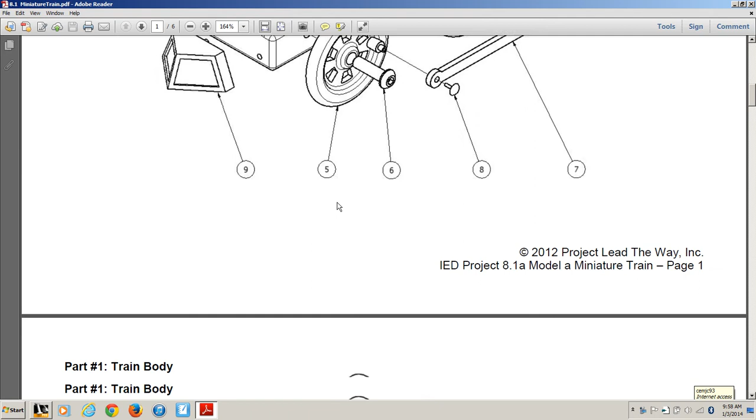As we go through those videos, it's very important that you not just watch the video, but that you also have the train body and dimensions in front of you. Some of the dimensions will be harder to see on the screen, and you'll need to pull them off of your document.

That's one thing that's very important. And the other thing is, some of these steps you probably could build most of the train body on your own, although you're having to pull together all these different skills we've learned into building the part. The only more challenging thing, that we haven't done much yet, is working with work planes to drill the hole in the top.

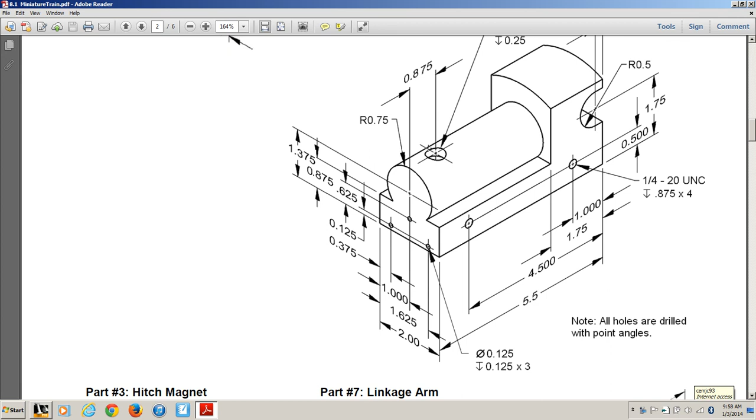So let's go back. The other thing to realize is, how are you going to build the train? What orientation are you going to build the different parts in? When we start a sketch, you want to always think about that.

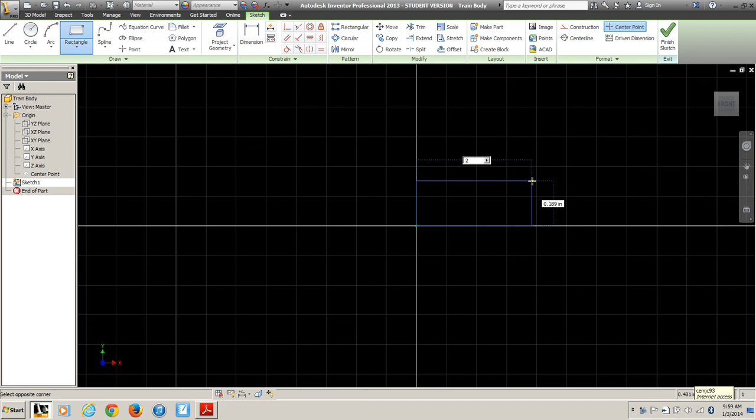So for the train body, we'll start out with a rectangle that's 2 inches wide by 0.875 inches tall.

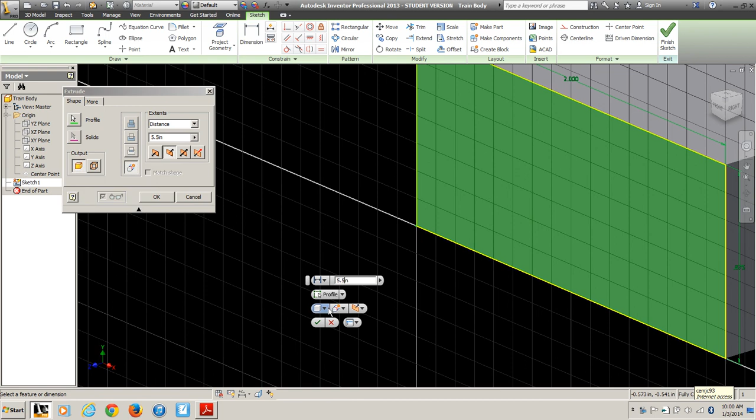Okay, and then finish sketch to extrude, and I want to make sure I go back, and I'll go ahead and go the full length of the train. Okay, so that gives me basically the full length of the train.

Next, I'm going to start with a sketch on the front. Let's go ahead and put a center point on there. Make sure it's in the center, make sure that's exactly 1 inch.

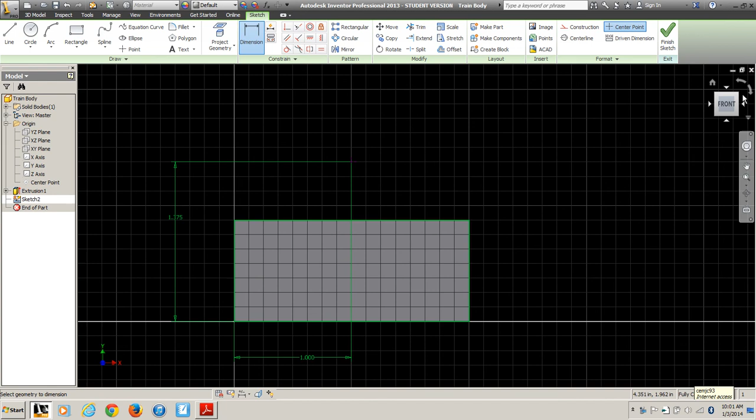And then that also needs to be 1.375 above the bottom of the train. And then we could just do a circle, and the radius of that circle is 0.75, so the diameter will be 1.5.

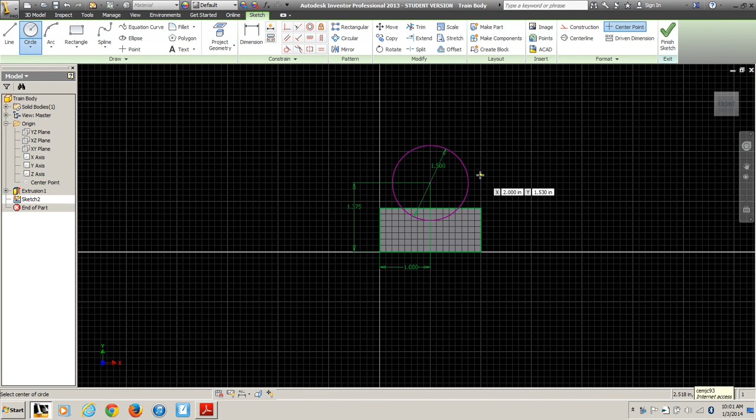And I want to just go ahead and extrude that, joining, and go ahead and go the full distance. Okay, and that's okay that we have that barrel on the front where the locomotive is.

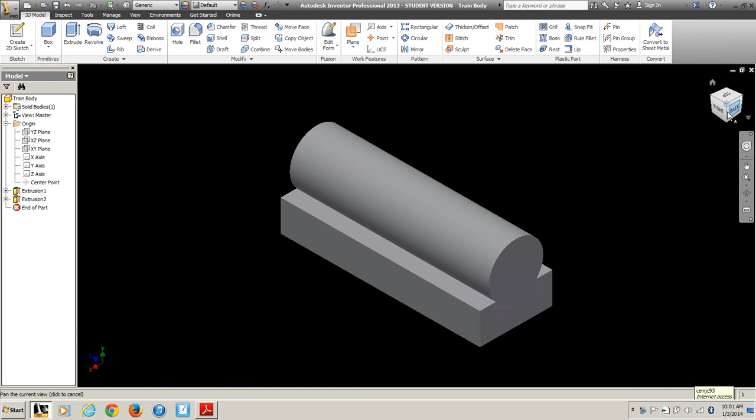Let's go ahead and flip around to the back side of the train. Although it's the front and back, I want to continue to build it in the orientation that I'm going to do. And then you'll notice that on the back of the train there's an arch there, and it's centered off of a hole.

So what I might want to do is go ahead and drill that hole for the hitch peg first. So then I can use that geometry, make sure that's an inch from the side and 0.375 from the bottom.

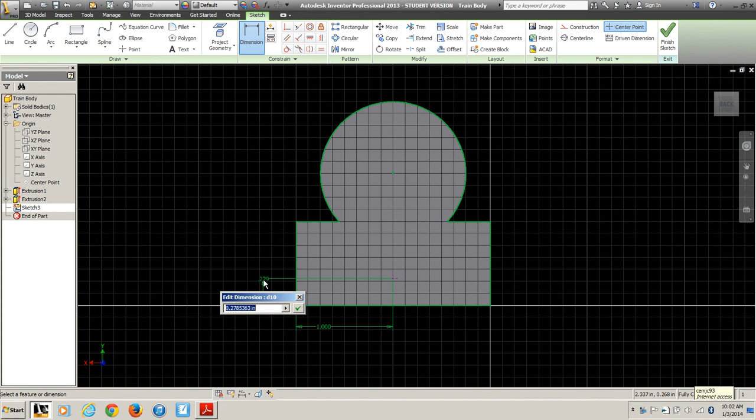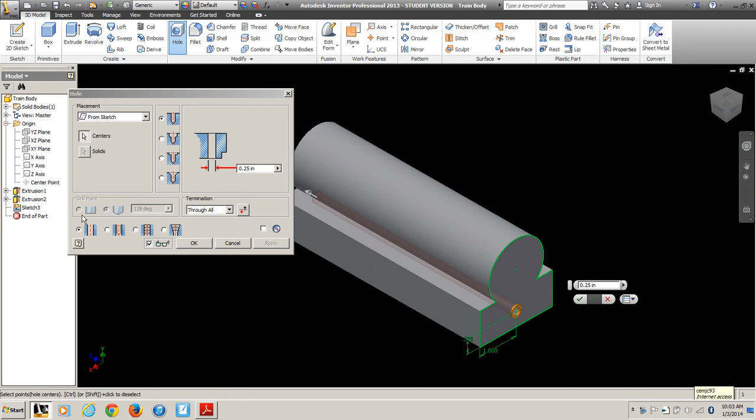Okay, so once I have the hole, then I'll go ahead and throw another sketch on that back plane. And what that gave me is this little point here that will allow me to use that center point for this rounded part on the top.

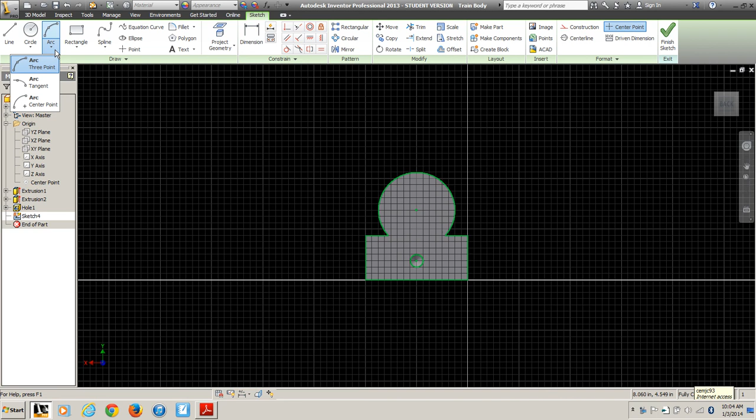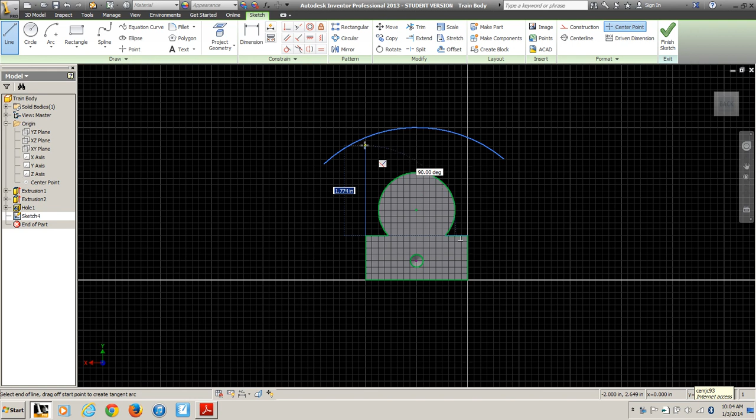So I'm going to go ahead and select the center point arc, and I'm going to make it bigger than it needs to be. And then let's go ahead and enclose it. Now make sure we're going up at 90 degrees, keep it perpendicular, on both sides.

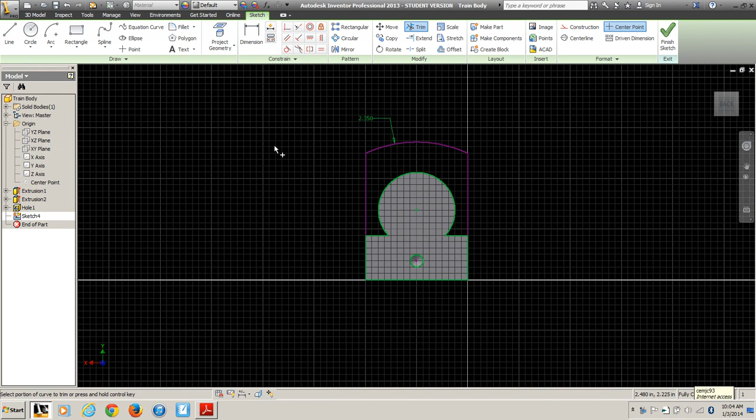And then if we dimension that to be the radius of 2.35, and then use the trim tool, that should give me a shape that I can extrude 1.75 inches. I'm going to go the other direction.

So there's the basic cabin shape, and now I need to do a sketch on the side to cut out this little notch here. Now you'll notice that is a half a circle, but then there's also a flat side off of that half circle.

So again, one of the things I failed to mention, but we always want to make sure your sketches are fully constrained. So sometimes it's nice to put a center point on there and dimension that first. That way you know exactly where everything is.

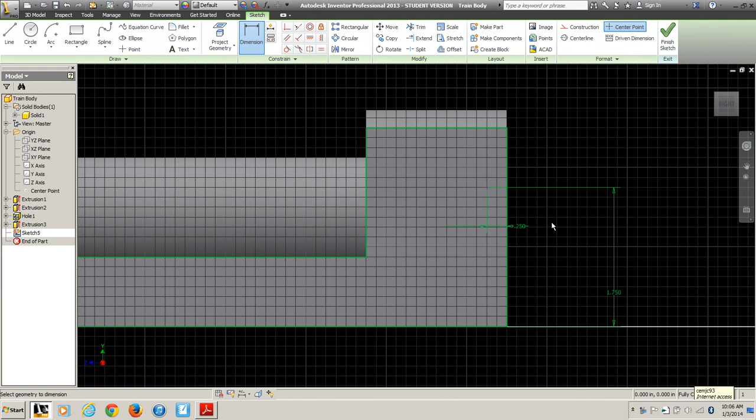That's 1.75 from the bottom and 1/4 inch from the side. So that puts that center point in the right place. And then I'm just going to go ahead and do the circle tool, which will be a 1 inch diameter circle, 0.5 radius.

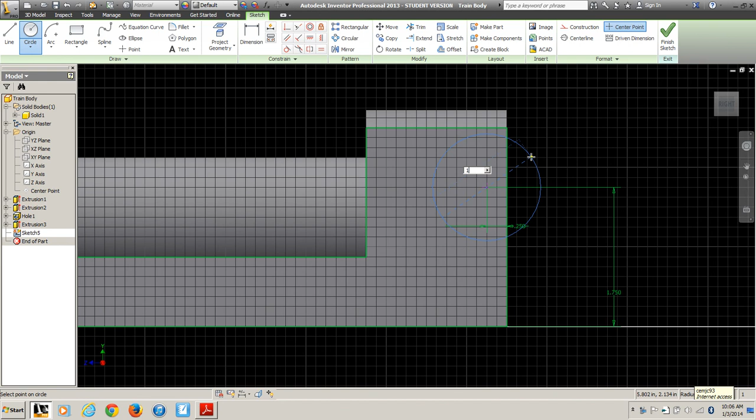And of course it's a little bit too big, but that's okay. And then next thing I would do, I want to make sure I'm directly above that point and draw a line, keep it tangent, and put it on the next line. And then again do the same thing on the other end. Make sure you have that tangent symbol.

Oh, and I lost my point of tangency there. Let's go ahead and add that back on manually using the geometry. And then let's go ahead and enclose that shape. And then let's trim off the parts that we don't want.

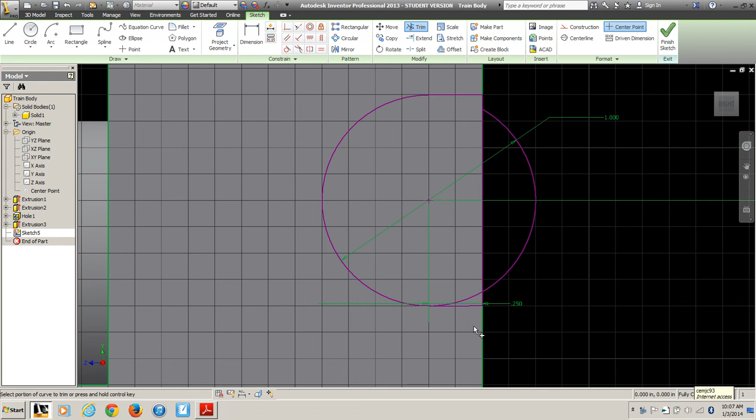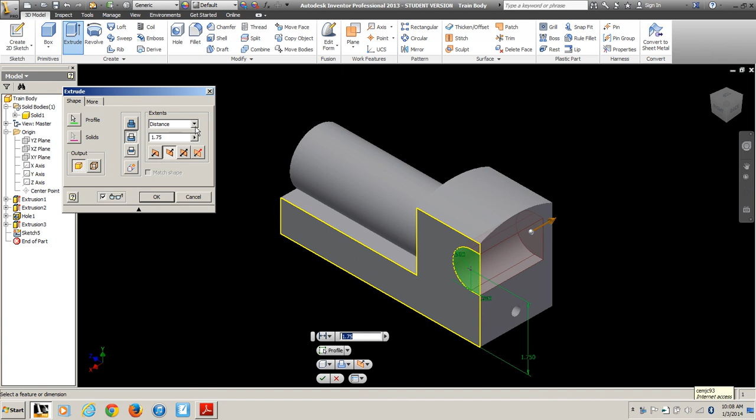Now when I did that, I lost my dimension there. Okay, so let's add that back on. It's fully constrained. So then, of course, finish sketch and do a cut extrusion. All the way through. And there's the cutout for the train.

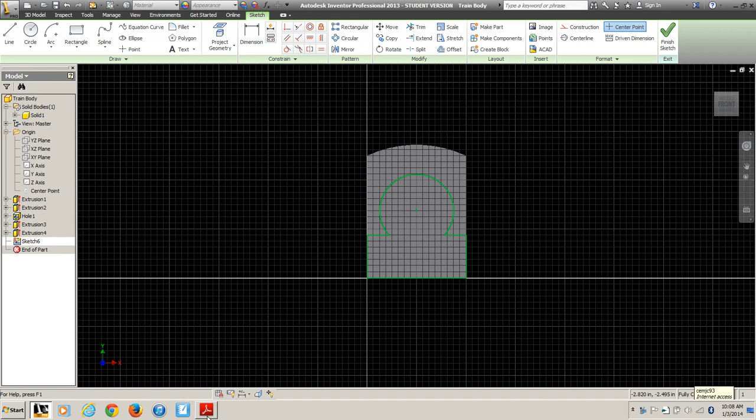Next thing to do, go back around to the front. Now we want to drill some holes. And those holes on the front are very specific. They're 1/8 of an inch above the bottom, an inch, 0.375, an inch, 1.625. So those are all positioned there. And then that'll be an 1/8 inch diameter hole, 1/8 of an inch deep, and there's 3 of them that are all the same. So that's how we read that hole note.

So the easiest way to do that, of course, is let's just put some center points on there. You always want to drill holes as holes. So let's first put that center point on there and make sure it gets put in the right place. When you have a hole, you never want to do a hole as an extrusion. You always want to do it as drilling a hole and use the hole feature. And then I'm just eyeballing these. We'll add dimensions in a second here. Even though that said 1.125 here, you'll notice it wasn't exact. Inventor is a very exact program, so if it's not exactly that number and it's rounding, it won't assemble.

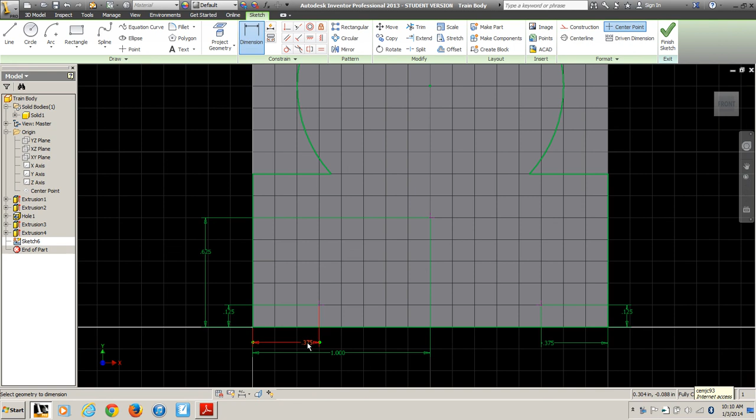And they're each 0.375 from the side, so .125, 0.375 from each side. Okay, now I have 3 purple points. So we'll go ahead and drill the holes. And the holes are 1/8 inch diameter, 1/8 inch deep. We'll go ahead and say OK.

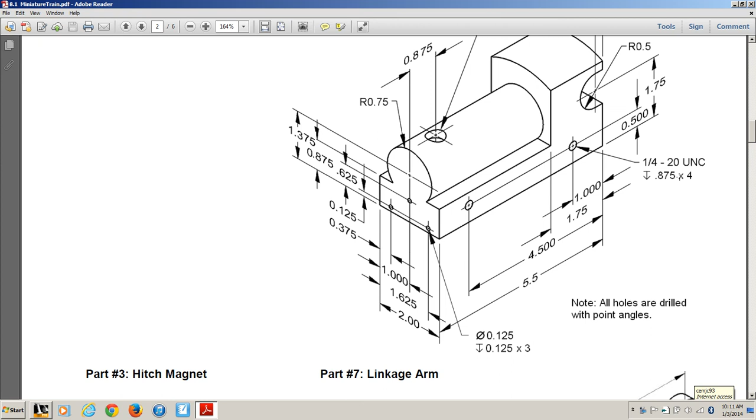Alright, next, let's drill holes for the axles. And you'll notice those holes are 1/4-20. That means they're tapped holes, they're threaded. 1 inch from the back, and 4.5 inches from the back, 1/2 inch up, and there's 4 of them. They're 7/8 deep, so that means they're going to be on both sides. So let's put some center points on again. Again, I'm just eyeballing some points, and now we'll add some dimensions. They're 1/2 inch up. An inch from the back. And 4.5 inches from the back.

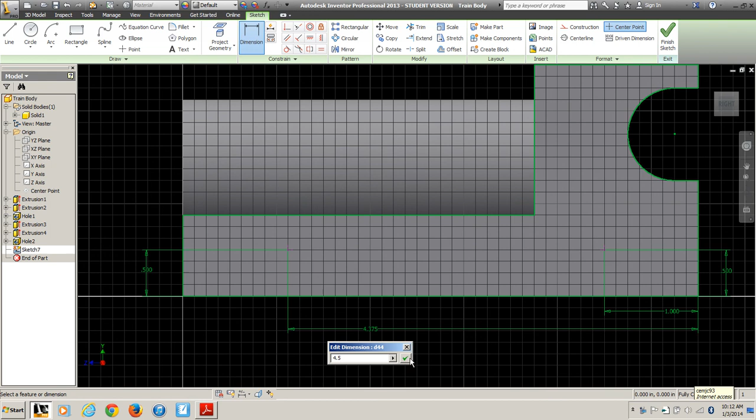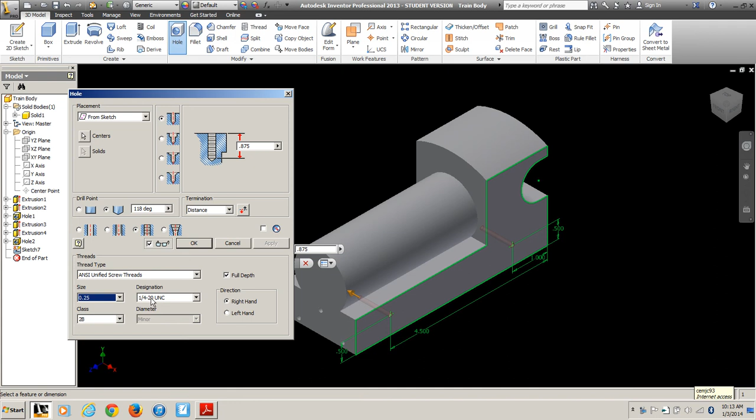Okay, and then we use the hole tool. This is a tapped hole. It's 0.875 deep. It's a 1/4 inch, 1/4-20 designation. Going to be threaded full depth, regular UNC coarse threads. That 1/4-20 means 20 threads per inch. Go ahead and say OK, and you'll notice we have those holes.

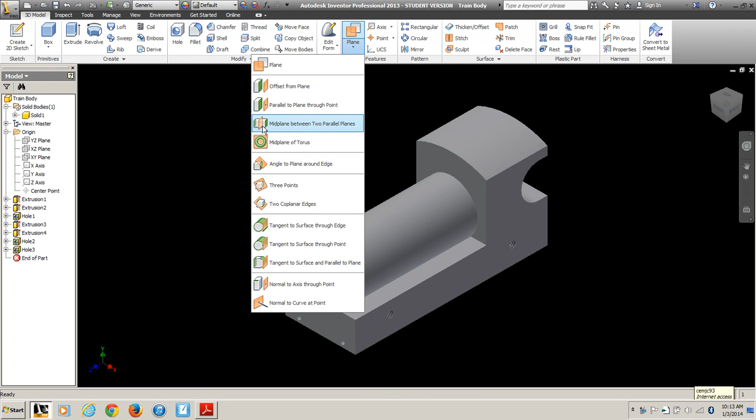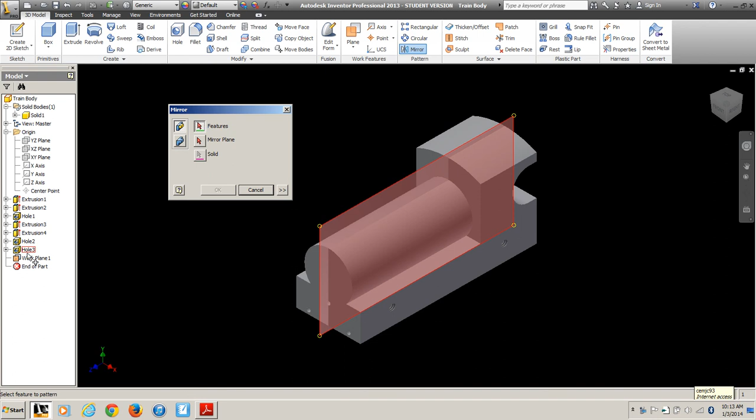We could go ahead and dimension those center points on the other side, but this would be a good time to make use of a mirror and use a work plane. So we have all these different work plane tools, and in this case I want to mirror those holes directly to the other side. So here I want to select a mid-plane between two parallel planes. If I select that side of the train and then the other side, that puts a plane in the middle, and then I can make use of the mirror tool. We want to select the features and then the mirror plane, and then say OK. And you'll notice now I have holes on the other side as well.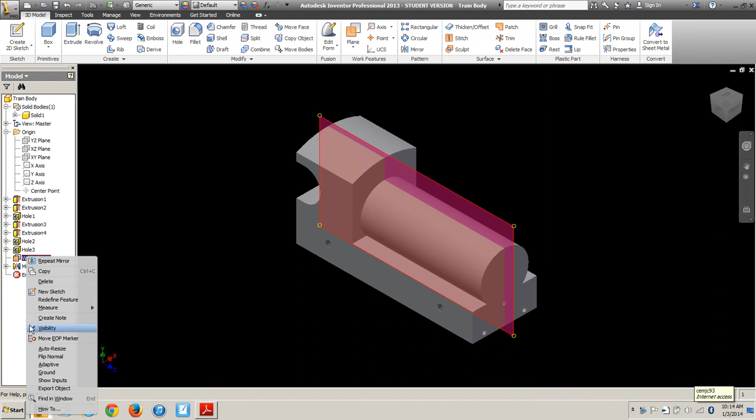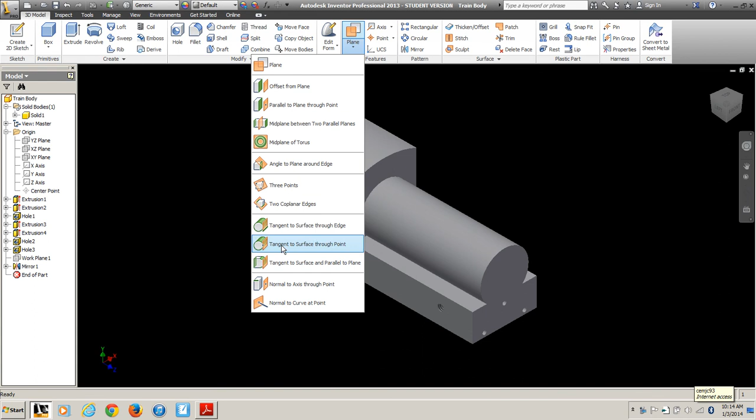Okay, now that work plane, if you don't need it anymore, you can't delete it or it will delete your mirror, but if you right click on it in the browser or on the object, you can turn off the visibility of the plane. So now it's grayed out like a sketch that's been used. And then we want to use a work plane again to drill the hole on the top. This time we want to be tangent and parallel to the plane. So I want to pick this edge, and that's going to be parallel to the plane on the bottom.

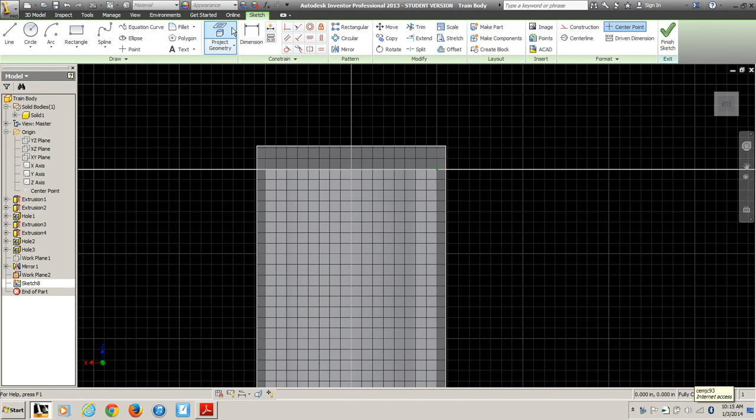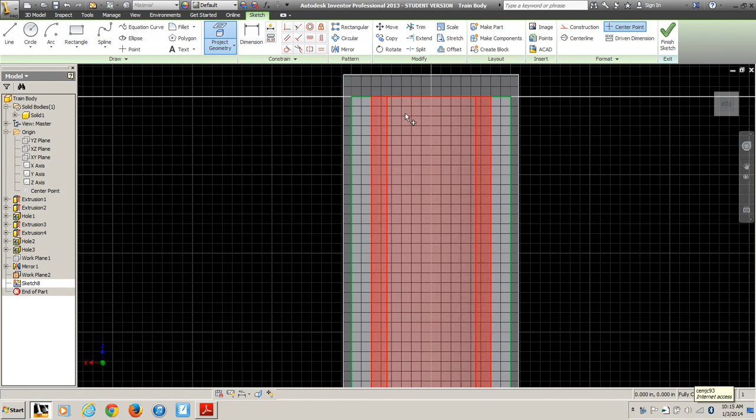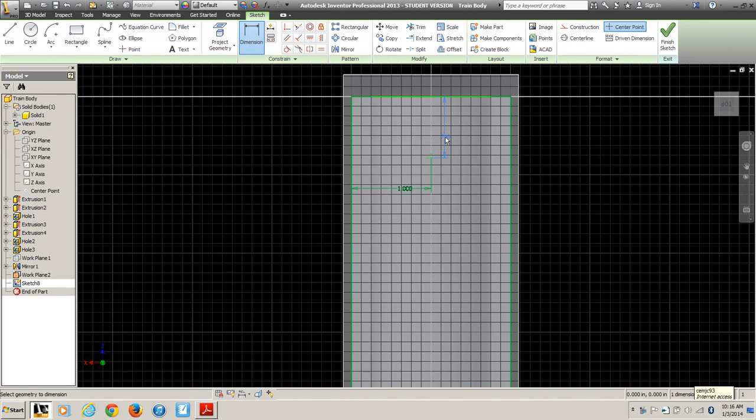So now let's put a sketch on that plane. And the other thing that's important when you're using work planes, we need to do project geometry. So I did project geometry. Really, that would be enough there. I just need to make sure I get that hole drilled on the center of the barrel of the train there. So I just need to project enough geometry to get what I want. So of course we'll dimension that. That point is 1 inch from the sides. And 0.875 inches from the front.

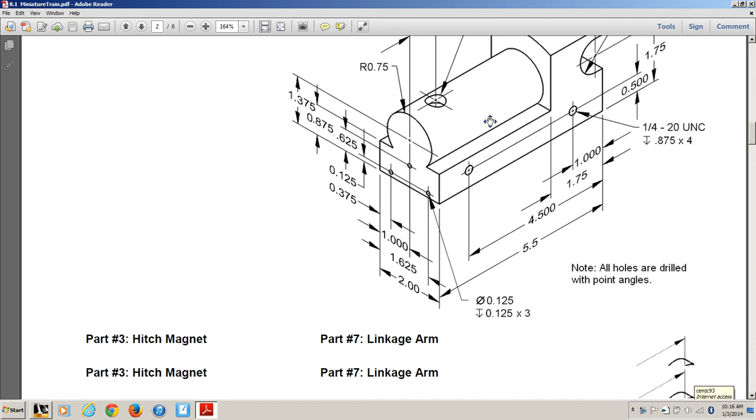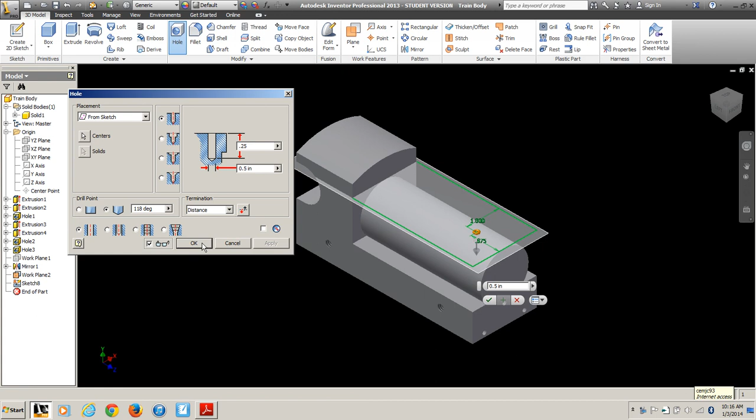So now we can select the hole to drill, and again that hole is explained here. It's 1/2 inch diameter, 1/4 inch deep. So we're 1/4 inch deep. Half-inch diameter. Okay, so now we have the train body, other than we don't have any fillets on it yet. Let's turn off the visibility on that work plane.

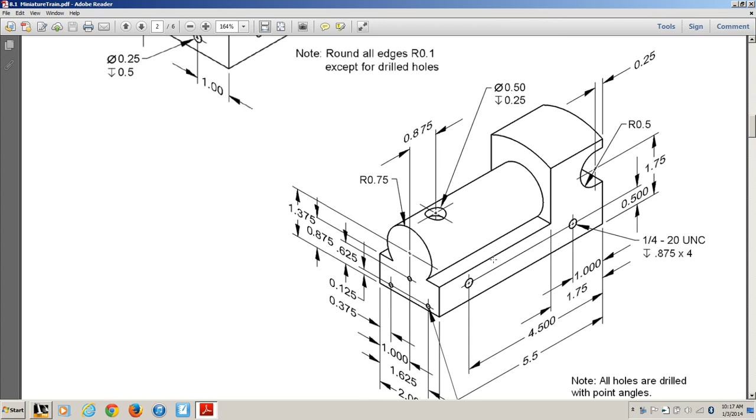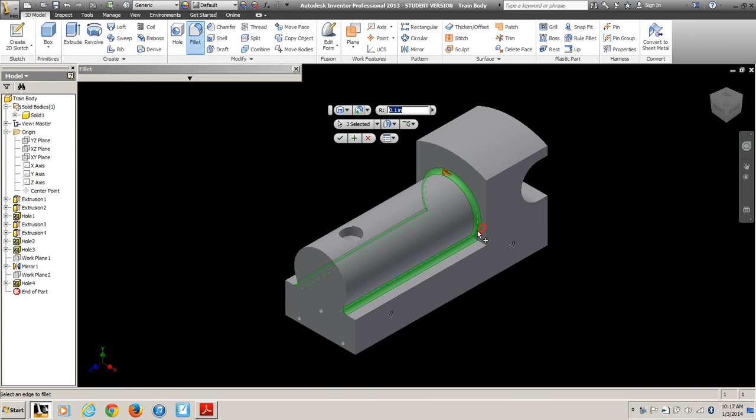So you'll notice there is a fillet note: all edges are going to be rounded 0.1 inches except for the holes. Now if you do these fillets in the wrong order, you'll end up with some goofy looking shapes on your train. So it's a good idea to do a few at a time and make sure if you do it to one side, do the other side. The first one I would want to do is that inside there, that rounds off the inside corner, and then those inside corners. And let's go ahead and apply those.

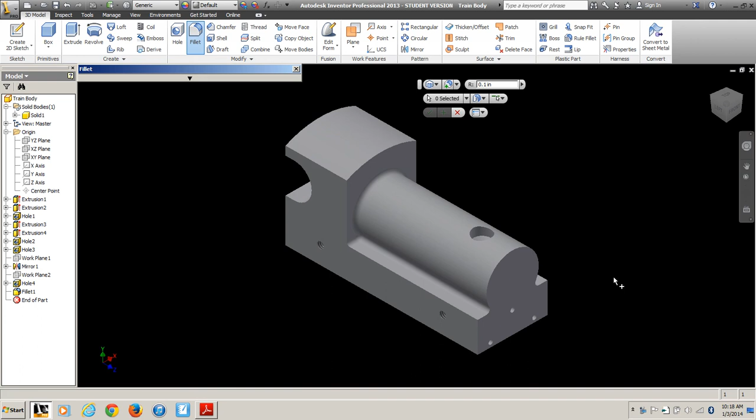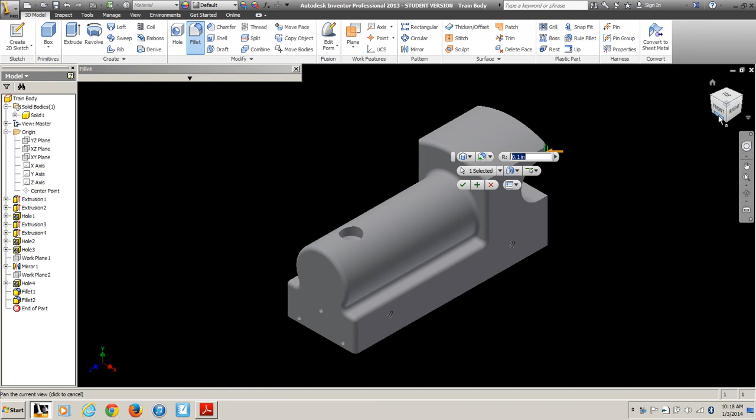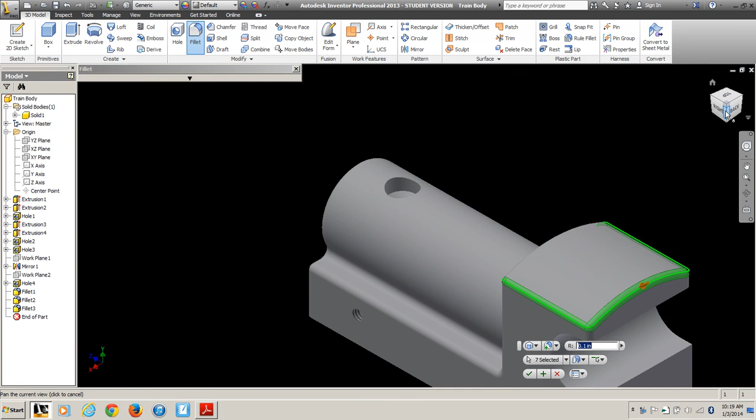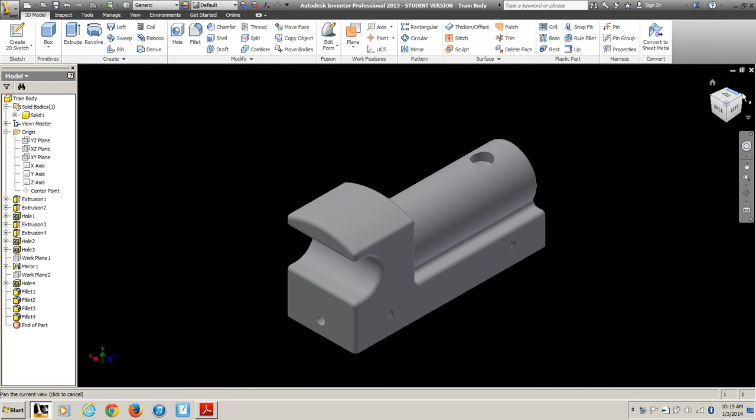You can always come back and add fillets later. You can always do multiple steps. If you try to do all those fillets at once, sometimes you end up with some problems. Let's go ahead and do those small fillets on the back first. Now where's my fillet tool? There we go. Okay, and now you'll see everything has nice smooth edges so that nobody will cut their fingers. I think the only thing I missed now is the bottom. There we go. Okay, so there's the basic train body.